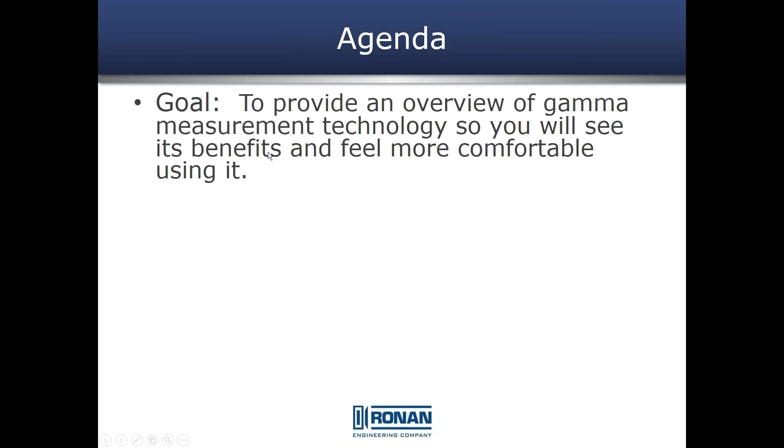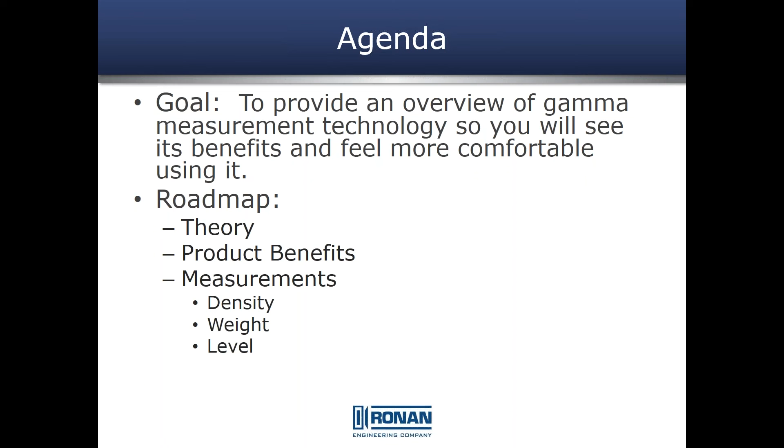This is Becky Olliges. I'm going to talk this morning about non-contact nuclear measurement and just give you a general understanding of what we've got. My agenda, my goal is to provide an overview of our gamma measurement technology, so you will see some benefits and feel more comfortable using the technology as a measurement solution.

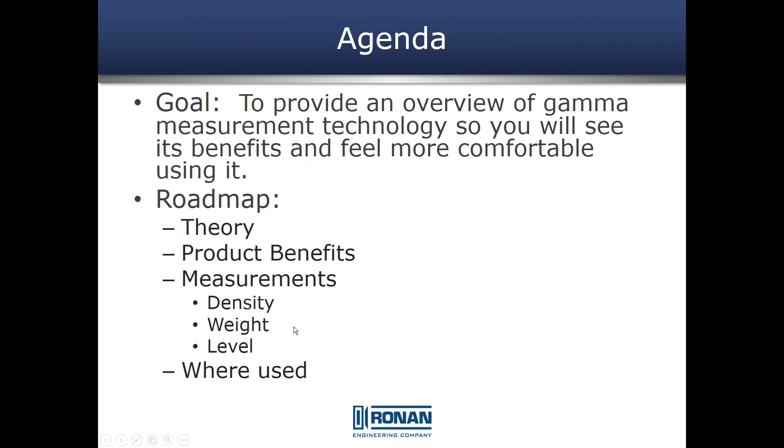I'm going to do that by giving you a little bit of the theory, some of the product benefits. We'll talk about the different things that the nuclear technology can provide measurements for, density, weight, and level, and then we'll give you some examples of where it is used. So first, in order to understand what we are talking about, I wanted to give you just a little bit of the theory behind it. We won't get too technical.

We all remember chemistry and how an isotope is a non-stable atom. What we do in the nuclear industry is use one of the isotopes that is unstable and use that energy to penetrate through vessels or tanks or material to be received and use that energy to make our measurement.

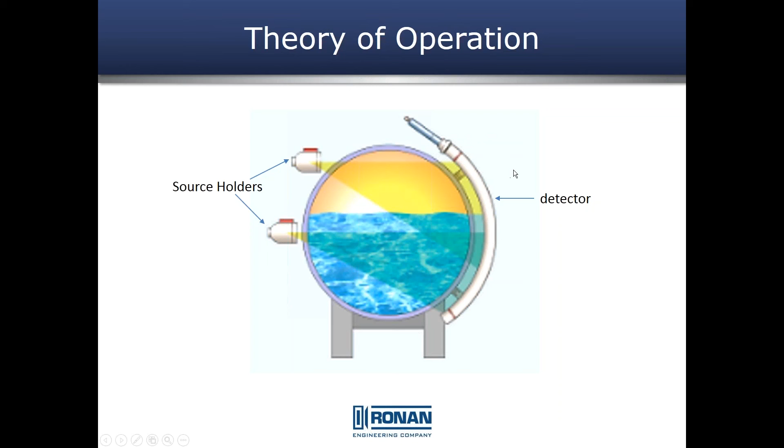So the way that anybody in our business is offering the solution, they have a source holder that has that little isotope in it. It collimates, penetrates through the vessel, as you can see here. Then there's a receiver or detector that receives that energy. Then from that, there's a brain or a transmitter that then would give you the output that you want as a customer.

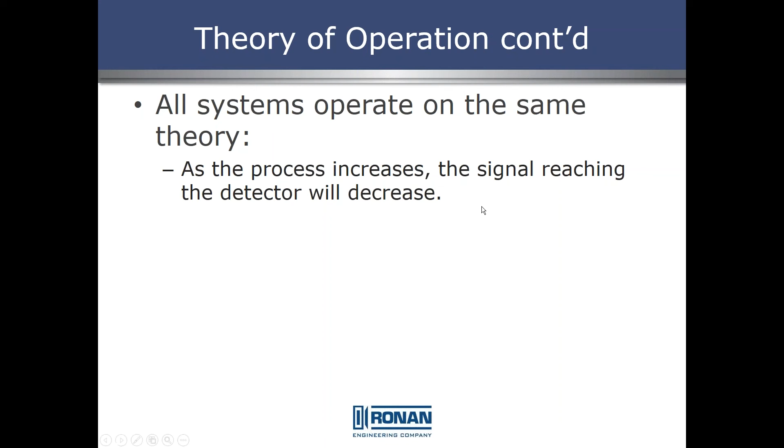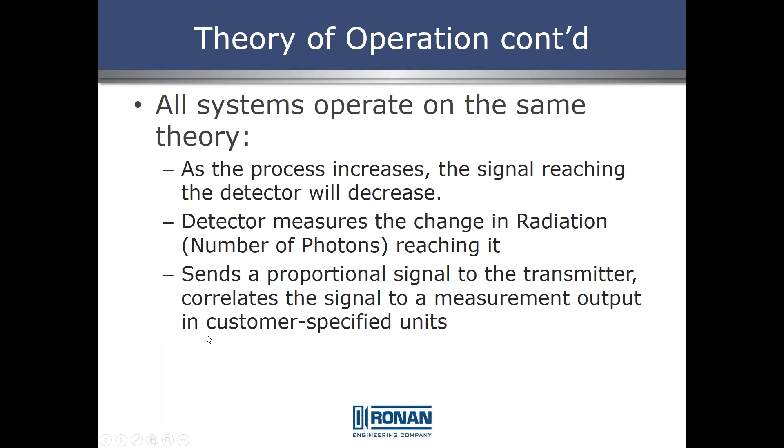A little bit more about nuclear systems. They all operate the same way. As our process increases, the signal reaching the detector will decrease. The detector measures the change in the radiation or the number of photons being received, and it sends a proportional signal to the transmitter, converting that signal to a measurement output in the user's specified units, like a 4 to 20 milliamp or HART milliamp, Foundation Fieldbus, Profibus, to name a few.

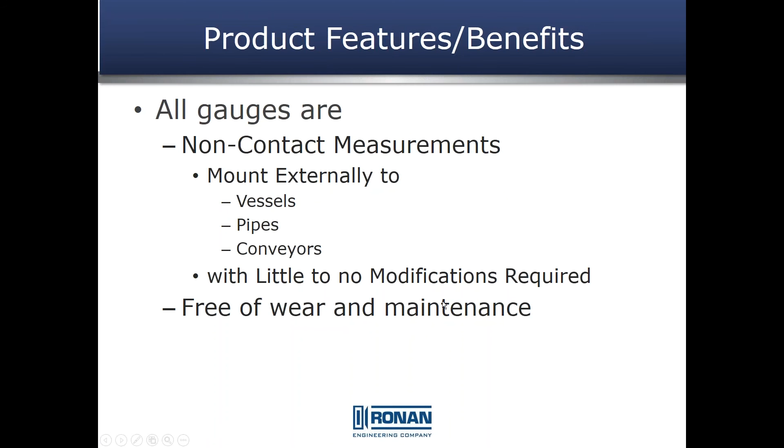Some basic features and benefits of the products. All of the gauges or systems are non-contact. So they mount externally to vessels, to pipes, conveyors. There's little to no modification needed with the technology, and for the most part they're free of wear and tear maintenance because they have minimal to no moving parts.

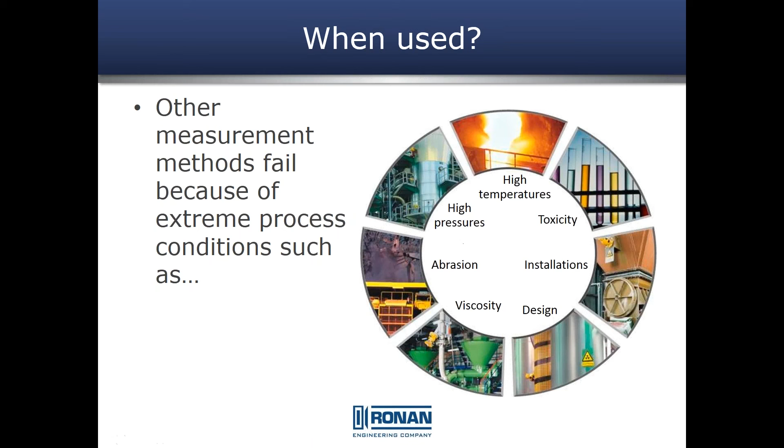What we like to say is when other measurement methods fail because of the extreme process, that's when the nuclear technology comes in. So extreme processes include high temperature, toxicity, installations, design, viscosity, abrasion, high pressures, dust, moisture.

So the types of measurement that a nuclear or radiometric device can make are a measurement of density, a measurement of weight, or a measurement of level. And as a manufacturer, what we offer and what any nuclear manufacturer offers with density is that's on a pipe typically, giving you specific output. It could also be used in line with a flow meter to provide mass flow output.

For a weight measurement, it's being installed on a belt, a screw conveyor, an auger, drag chain to provide the mass flow output through the belt. And for level, obviously that's being installed on a vessel to provide a continuous level or a point level, and they even put them in steel mills providing a mold level.

So the density principle is the one I'd like to touch on first. That product is pretty simple to understand. The source is obviously on one side, and here's the detector or receiver on the other side. You're mounting it on a pipe that is vertical, and ideally you want the flow to be an upward flow. So we've got an upward flow, so we have a full pipe, not much air to it.

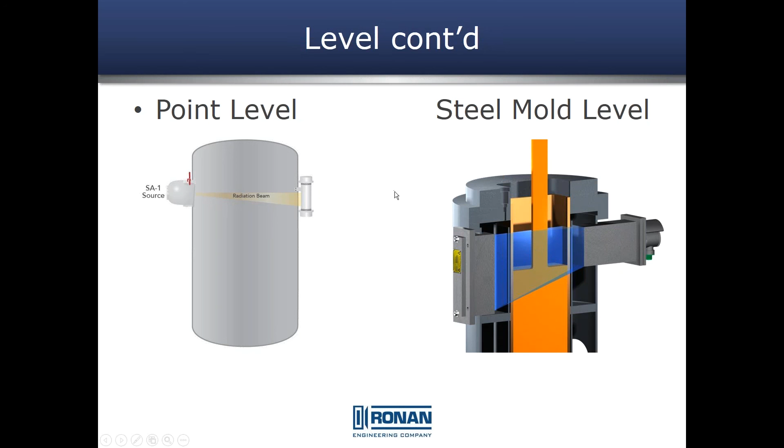So are there any questions before I wrap up? I don't have any questions coming through, Becky, so okay, you know, if there are some other applications. Yeah, that made it through pretty fast. If there are any other applications that you can think of that we might want to talk about before we give up on any questions coming in, why don't you go ahead and talk about them?

Sure. We have some belt scale or some scale applications that I know that we've done with these.

We have some level applications that we've done with them. And I know you've been out in our territory. Maybe you can talk about some of the local applications that you're aware of that we've done. Absolutely. For the belt scales, in our industry, we're putting them in ethanol plants to measure the whole grain, also to measure the wet goods and the dry goods coming out to help the ethanol plants with a better output

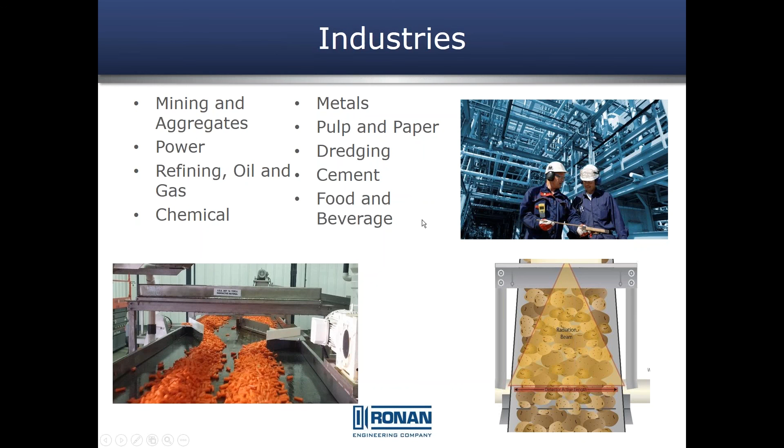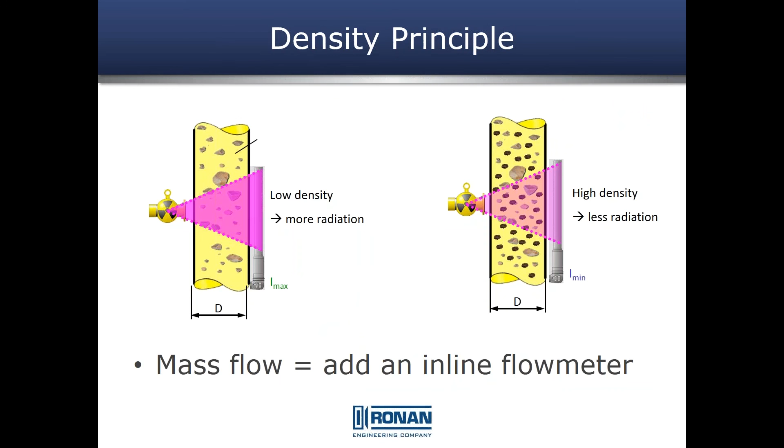inventory. We've got some belt scales in foundries measuring sand that goes into the molds for the castings and the forgings. We have some weight scales installed at, I'm trying to think, it's a hybrid company that makes grain seeds to plant in the ground. So they're measuring that as they're bagging it. We also put weight scales in coal mines and coal-fired power plants.

With density gauges, everyone in our industry has quite a few density gauges in the coal industry on the slurries and in the FGD process because, again, nothing else is working to make that measurement, and it's important to the customers to have that. For level, go ahead, Mike.

One of the questions that's come in is what's the accuracy of the weighing measurement on a conveyor belt scale? They can range from plus or minus 0.5%, and it can get as wide as plus or minus 5%. It all depends on the density and the speed. So the lower the density, the faster the speed, the less the accuracy? That is correct. Now I know everyone in the business is trying to maintain a 1% repeatability or accuracy when we're providing a solution. I know for Ronan we're offering.

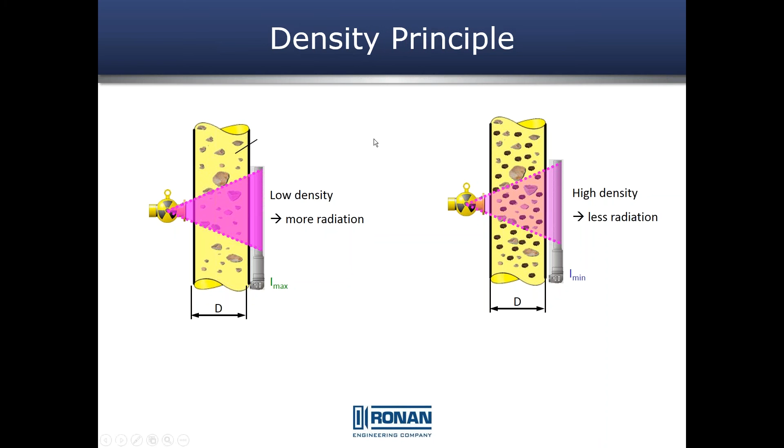So just how low can this measurement go if you have fairly low ingredient measurements? Is there a rule of thumb? Do you have to see the application? What are your thoughts there? Most of the time we like to talk about the application. Okay. Like to have the specifics, because we've done augers as small as 6 inches.

But going smaller than that, what are your thoughts on that? It would be hard. But as a salesperson, I don't rule anything out. You need the sensor to have some distance to pick up the measurement accurately. Is that correct? Yeah, and the material, and then the volume of material. Right.

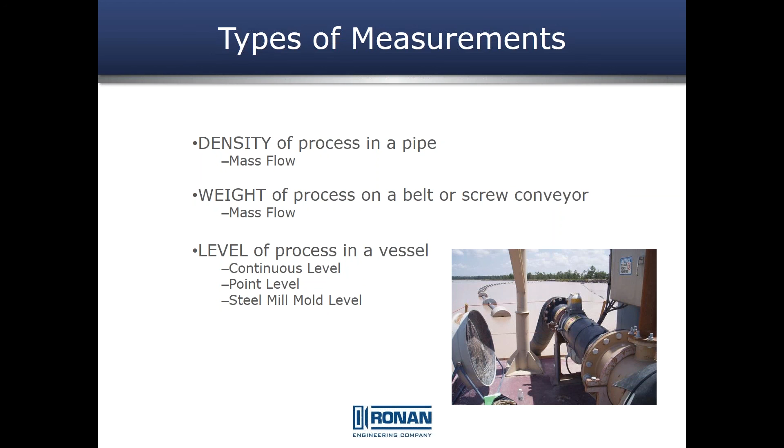The specific license is obviously site-specific, and you have a person dedicated to that. And a lot of people with level measurements have specific licenses because there's several inches of steel insulation that they're penetrating. So examples of level measurements would be like coke drums, fractionators, high-pressure separators, digesters in paper mills. That's just to name a few. Yeah, things that are very caustic, very difficult to measure with any other contact or even non-contact technology that might be looking in from the top.

That is. Any cautions in general for using these with a screw auger? No, none that I can think of. No cautions. I mean, your screw auger, you have a speed. If you don't have a speed sensor on it, we could get a speed sensor on the end of it, as long as we know what the speed is and what you've got running in there.

And you said that there is a size that you like to see the auger be. So you don't want really small augers. You want an auger that is a little bit bigger. Is that right? That is correct. I mean, I don't know enough to know augers that are 2 or 3 inches, how common those are. Okay. So the bottom line is we need to review the application, but in general, screw augers work fairly well. That is correct. Okay. And actually, the only precaution there is as long as the thing's not totally full. Okay. Interesting.